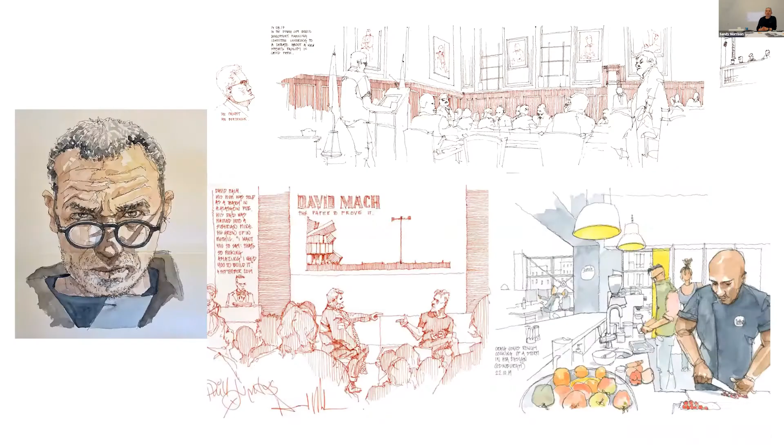Before I move on to that, I'll just tell you a little bit about myself. This is meant to be me on the left-hand side. I do a lot of drawing for my job. I'm involved with HTA in the design of all of the projects we do, so I draw a lot for that. And then I also have a little sketchbook, and I draw whenever I can as I go around.

The image at the top here is from a planning committee in Dundee. It's actually when we were getting planning for a regeneration scheme that we did at Mill o' Mains, north of the Kingsway. The scheme down below that is Phil Dupitis, who I believe is actually now an art student, or was an art student in Dundee, interviewing the excellent David Mach, who we're working on a project with in Edinburgh, which I'll show you. And the bottom right-hand image is our Edinburgh office, which is designed around the kitchen. We all eat together, and we have a collaborative approach to work, which I'll tell you a little bit about too. So, but first of all, 6 o'clock on a Friday night, let's cut to the chase.

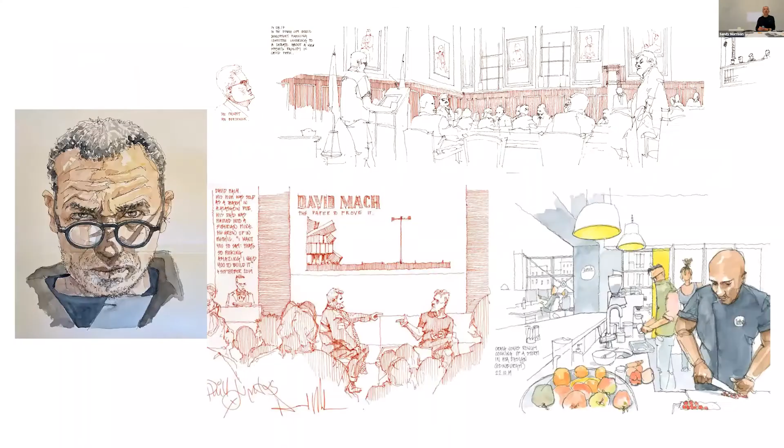Sustainability, we're all talking about that. We have an ever-increasing population, and we need to create biodiverse environments around technically refined homes. I'll say a bit about that. And then the way that we think we can do that is by using order to allow us to come up with solutions that we can repeat and to avoid the bespoke, in order to make things which would otherwise be very expensive because they were designed as one-offs, much more available to more people. And then finally, a little summary and a little discussion about beauty, not because we particularly think we've cracked it or we know what it is, but because we do think it's important. It's obviously important when we're making places that they are beautiful.

Forgive me while I drink my Friday night beer at the same time. So this is HTA, so there's about 200 of us. We're in offices in London, Manchester, Bristol and Edinburgh. And the office has been around for about 50 years, 51, I think we are now. This is from last year when we did posts about our sort of 50 years. Throughout that time, we've been focused on making places that people like to live.

We do all the kinds of places that people like to live. We don't build hospitals, we don't build prisons. People do live there, but they don't really want to. So we do everything else.

In the beginning, we became known as community architects. We were Hunt Thompson, and what distinguished a community architect was someone who actually went and asked the community what they wanted before he went and built something. That was innovative enough to make you stand out from the architectural crowd. So we were community architects.

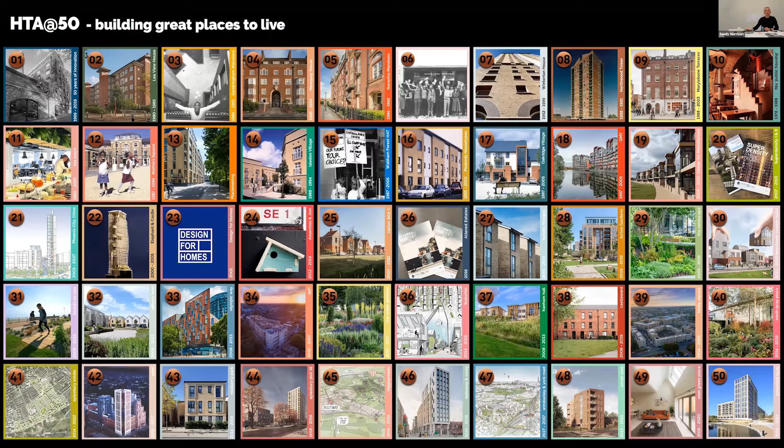We also want to be a great place to work. You're all training to be architects, and I think it's quite hard to be an architect. Quite a lot of people in their job, they either do it right or they do it wrong. We're in this interesting world where you're designing things, and sometimes people will like them and sometimes they don't, and that's a hard thing to take. So working as an architect or designer is quite tricky. And then the government or the world throws in the occasional recession, which makes it even harder. So we do want you, when working in our organisation, to be having an enjoyable time.

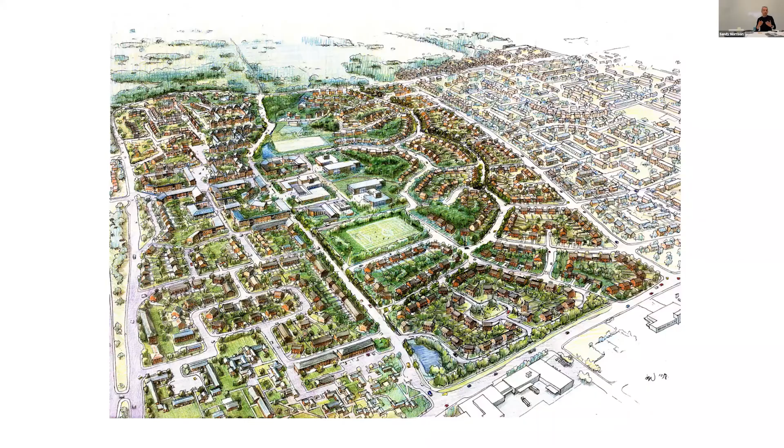So architecturally, it's a relatively subtle thing to do, because it's 2-storey semi-detached houses. It's not the monuments that were there before, or even the sort of modern urban place that architects and others are familiar with. However, it did deliver the sort of transformation that the people who lived there wanted it to do. And some of the big moves, like putting in these balancing ponds for the SUDS, really made it quite different from what it was before.

And then when we won an award for it from the great and the good at the end of the 10-year period, and it was all changed, it was Beck who turned up to collect the award. So whilst you might think, well, is that enough to have done with that place - we created the place that the people wanted.

So moving things on, that was 20 years ago, but I thought I'd talk about it because it was Dundee, and it shows you how we work with people. Working with people is at the heart of what we do.

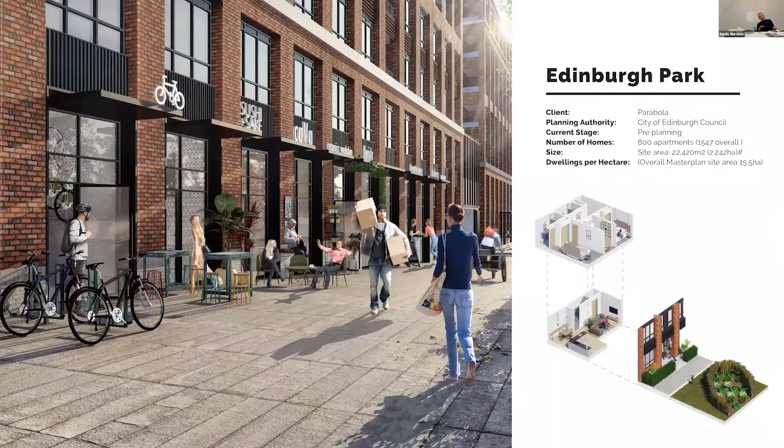So I was going to show you an Edinburgh scheme with a similar number of homes, but about 4 times the density of the suburban development we were looking at in Ardler. Ardler is 900 homes, about 30 to 50 dwellings per hectare. This is a bit more than that.

This is Edinburgh Park. There was a business park created here by Richard Meier, or to his master plan, with office buildings all around the central park. It's based on how people thought in the early 80s, and then they built it in the 90s. Everyone drives, parks here, comes into your office building - you can overlook the park, but probably can't go into it. This is the airport over here, the train line to Glasgow coming up there, and the bridge is there. So it's right on the edge of town, but it has the benefit of all the jobs - fantastic jobs, fantastic green space already there.

We worked on a master plan with Dixon Jones, Sutherland Hussey Harris, and Alfred Hall Monaghan Morris on the office buildings, and Gross Max on the landscape, to make this new southern half of the park next to Edinburgh Park train station. We did the build-to-rent and the social housing. I'll say something about the difference between those two, since some of you are looking at housing and different tenures just now.

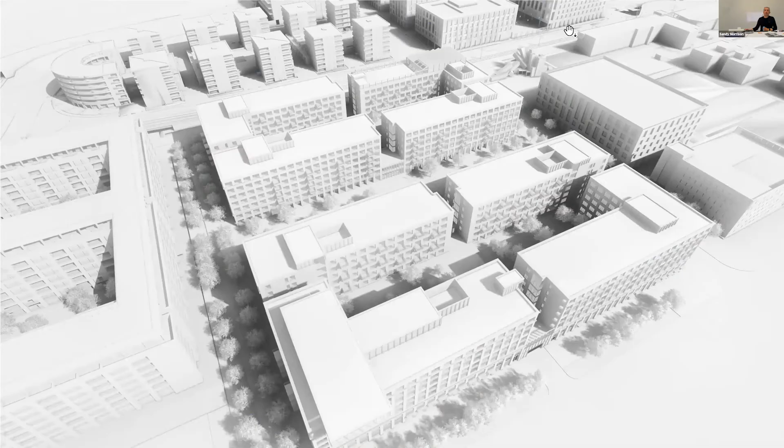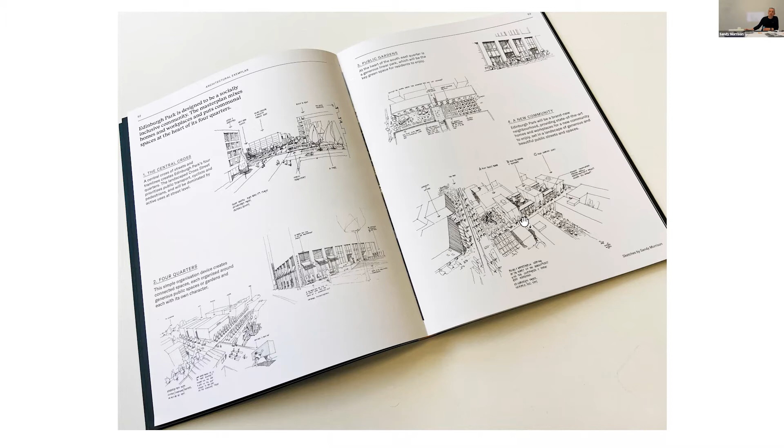The idea of the thing is basically a cross - the tram runs through the middle of it in a green corridor, and the tram stops just there. Then we built a new street running east-west in this direction, and then there's a big garden. We always like a big garden - I think living next to nature is a very important thing around here. This office building has now been replaced by the social housing building we've designed. Some of my sketches, which crop up from time to time, describe the key moves of the scheme: the central cross, the 4 quarters, a public garden at the middle of it, and a new community created around that.

The buildings were pretty big scale. For yourselves, looking at the schemes you're going to be doing in Dundee, we definitely recommend looking at local precedents and trying to learn things from them.

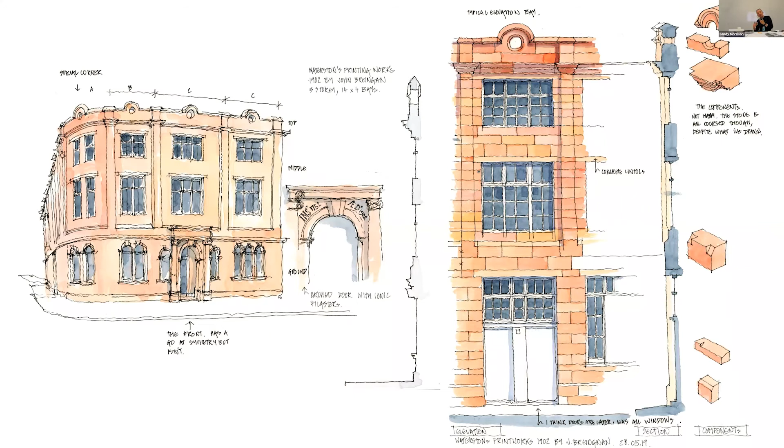So we were going to be making quite big warehouse-type buildings. We got out and had a look at some Edinburgh warehouses - this one's very near our office. What we're interested in here, and it relates to the order point we'll make later on, is the bay and how the bay can be assembled to make a bigger building, and how the bay itself can be made from smaller components that you can refine and design really well and then repeat. We like that approach.

A few sketches. The design quite often starts as early stage sketches to try and communicate the ideas of what we're trying to do. As I said when talking about Ardler, every move that you make with the space says something about the development that you're trying to create.

So we have a big central garden here and a build-to-rent scheme next to an expensive office park, and we've located the social housing at the end of that, so it has easy access to the park too, and we think that's quite an inclusive sort of move.

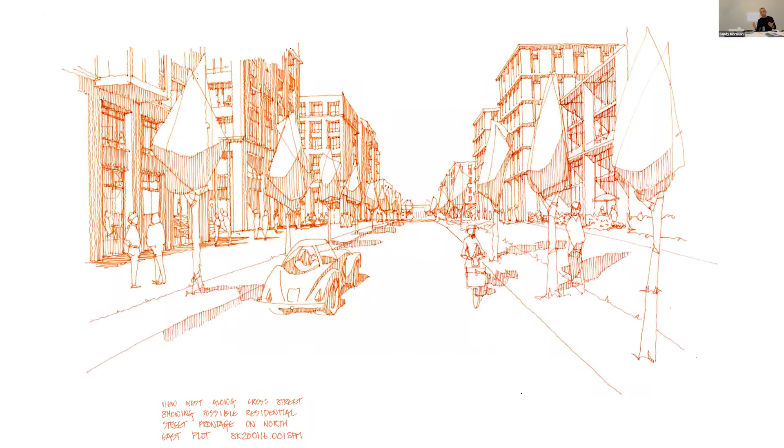And then we got to do both sides of the street here - build-to-rent side of the street on this side, and the social housing side of the street on that side there. And then when you develop that up, this is the sort of place that you start to make.

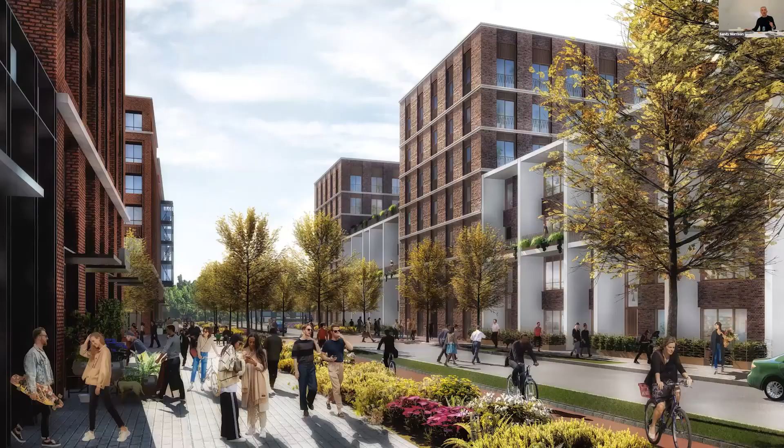Family housing in maisonettes here, a very green environment, bigger, simpler warehouse buildings with the apartments in them, segregated cycleways, and a distinctive thing for Edinburgh Park - nowhere to park your car. It's not seen as a car-dominated place at all, so we're not really allowing for the car. There are multi-storey car parks - if you come here and you want to park, that's where you go.

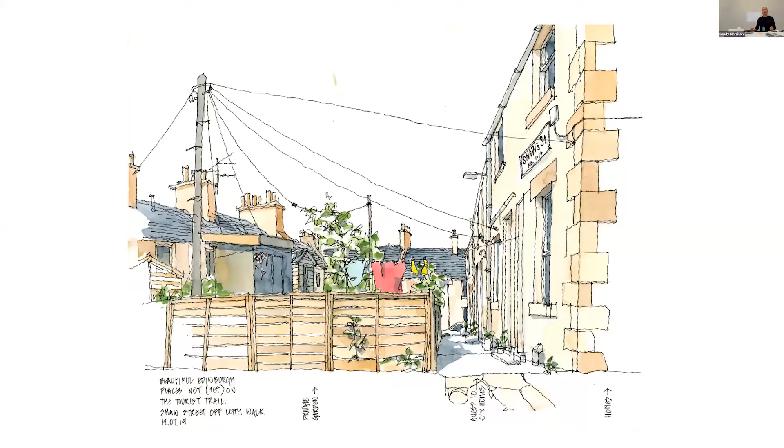And then again, sort of getting out there and looking for local precedent, which makes your scheme for this place a little bit different than it might be if it wasn't in this place. So this is just around the corner from our office, and it's a lovely little space. What they did here was there's housing along here, and there's a little footpath that runs between the housing and the garden, so everyone's garden is across a public footpath and away.

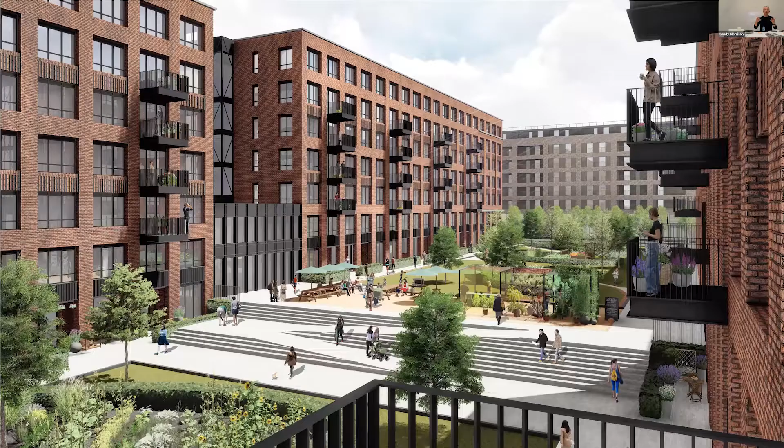And the consequence of putting all the private gardens into the public space is this incredibly green and interesting little place right in the middle, overlooked by everybody, and it has a very strong community feel. And we wondered whether we could do something different from that, but picking up on that theme in this new garden that we were going to make that ran down through the middle of our development.

So if you think that you have Hermiston Gate tram station here, and then you have the office buildings with several thousand people going to work in them, assuming that's what we go back to, you would then create this attractive garden that people could walk through in the morning, and they don't have to walk along the street, and this becomes a nice place to do and to be.

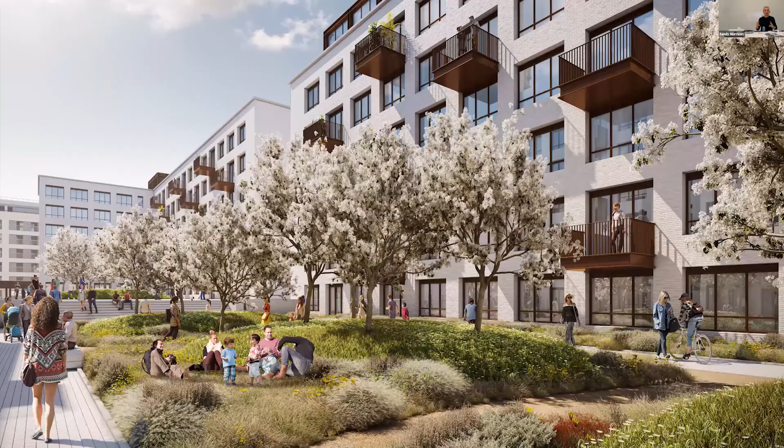And then Gross.Max filled this up with very attractive little spaces of different elliptical shapes and characters, where different things happen. And then we pushed all the balconies out into this space, and we think it can be quite attractive. On the other side of those buildings, just up at first floor level on top of the podium, we have another sort of garden, which is, in this case, for the residents of the build-to-rent buildings.

The change in the material here sort of picked up on the industrial aesthetic that we were pursuing with the red brick exteriors and the white brick to the courtyard.

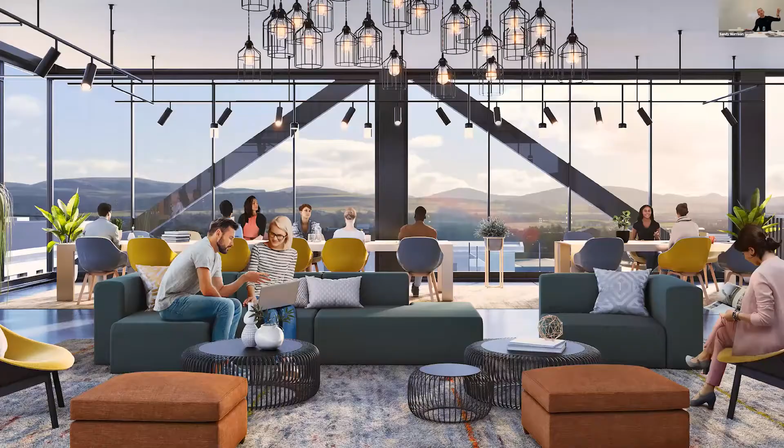We're very keen to use all the roof space, increasingly in development. Developments are denser, like I say, there's more and more people - how are you going to provide the attractive external spaces that they're after? So we're using the roof spaces as external roof gardens on the social housing here, and then on the build-to-rent housing, which uses all of its top floor space to make an attractive environment for all the residents. It doesn't have penthouses at the top level, it has lounges.

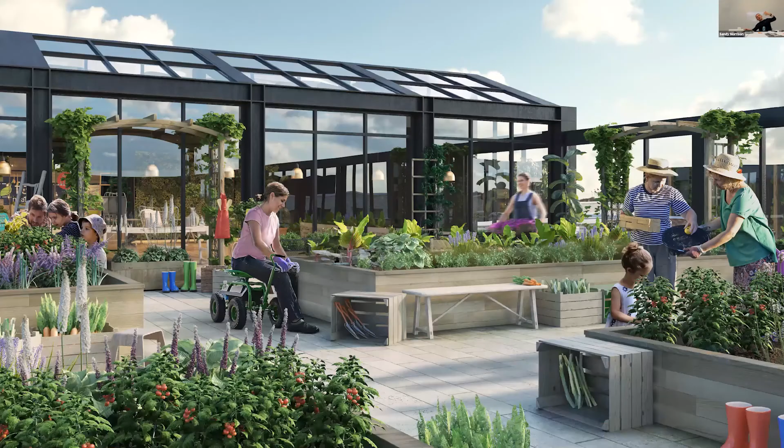So we put a little drone up and had a view to the south, and that's the actual view of the Pentlands that you'll get from that spot. Going back to the woman who wasn't wearing her wellies in the Eichler picture, definitely people growing and planting things is definitely a desire when people are living somewhere.

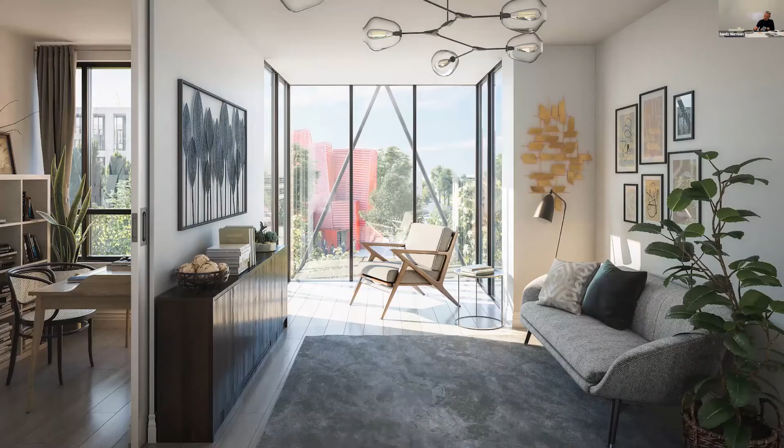So we used the roof space to make a big greenhouse and raised allotment beds. We're very inspired by the local East Lothian walled gardens and tried to make a space that had something of that quality. So having made, we think, quite nice streets down at ground level and a big garden and used the roofs, you need to make all the apartments fantastic too.

This is sort of the worst of the apartments, because this is a north-facing single aspect, one bed flat. So what we tried to do was push a bay out into the street, overlooking the square, which is just there. And if you've lived in Scotland at all, you'll know that come the summer, the sun comes right round to the north. So when you come home from work, you've got quite a nice space to sit in there.

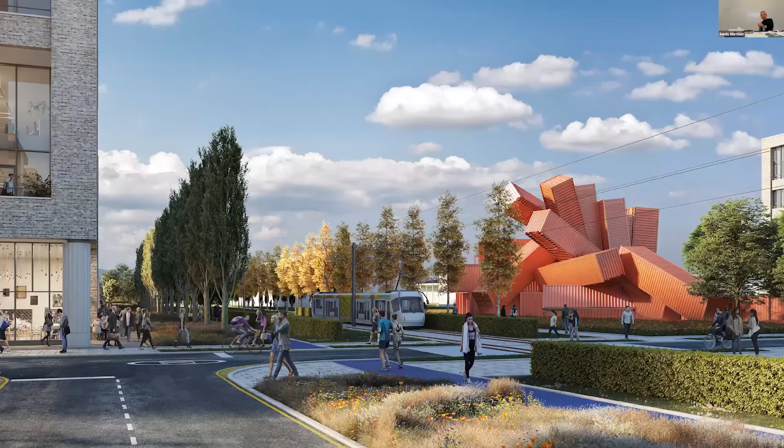And then the added advantage in this scheme, and it's always worth trying to work with artists or whatever in order to make the environment that you're making richer and more interesting, is that flat is actually looking out on this David Mach designed Mach 1 building here.

I'll move on to sustainability, my point number 2 of my 4 points. So the population is increasing all the time, and we used to look at sustainability as being a sort of bolt-on thing that you did to buildings, and it's completely changed from that now. It's now all about your attitude to how you're going to design your whole site right from the beginning, and I'll try and illustrate it from this scheme.

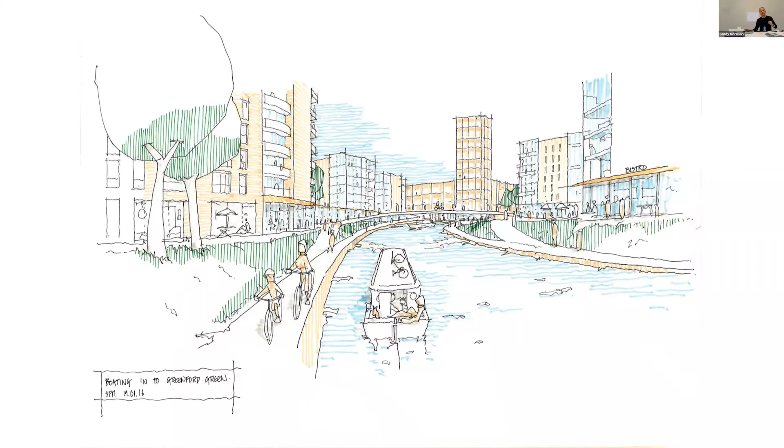So this is a project that we did in Greenford in London. We did it from the Edinburgh office. There's a canal here, and the idea was always to make sort of canal side living with build-to-rent accommodation, social housing, and private for sale housing lining the banks of this new place. We work for a big American build-to-rent investor and manager, they manage about 500,000 homes around the world now.

And this used to be the GlaxoSmithKline factory here, and it was the Hovis factory on the other side of the canal. They'd both been closed and were disused, and Greystar bought them both. So then we had the opportunity to design something which was on both sides of the canal and make a sort of canal living experience.

It's worth saying that all the housing round about here is all sort of 2-storey suburban semi-detached housing, no major public space or anything like that. And what it had lived with forever was a fence around all of this space here, and no one could ever go through it. It was always closed, it was always locked, it wasn't part of the community, and it would take you about 15 minutes to walk all the way around there.

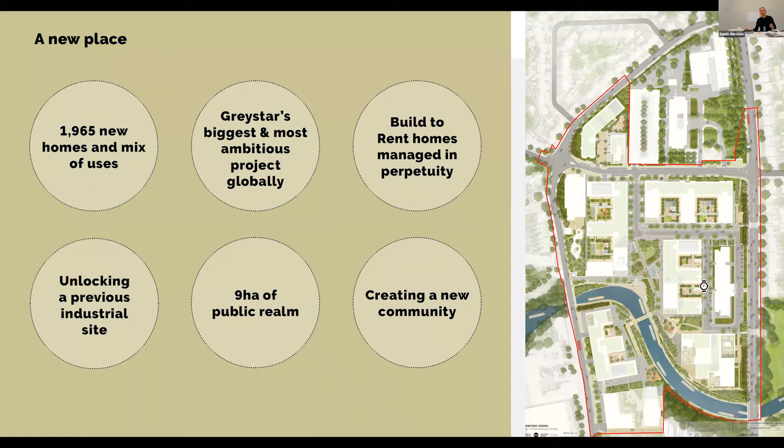So we were just about to open this up. What we wanted to do was create a bridge which would allow you to go diagonally across the site. But at the same time as wanting to create a bridge, which you can see we've started to make here, we didn't want all the stuff that goes along with bridges, like lifts and steps and all of these discriminatory, and indeed ugly and requiring maintenance things.

So the big number one sustainability move was to take all of the existing buildings already on the site, flatten them and crush them on the site, and keep the waste material on the site. And what that then allowed you to do was to lift the level of the ground adjacent to the canal to a level that you could cycle or use your pushchair to get right across the site, and people would walk along the canal side.

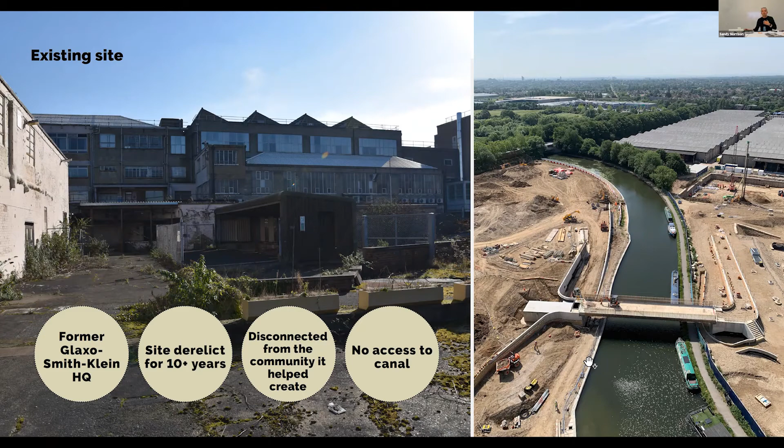It gave us the problem that the ground next to the canal was then about 2.5 to 3 metres above the level of the canal. And brilliantly, the landscape guys solved this by creating this south-facing amphitheatre. So we took a site which previously hadn't had anyone in it, and people couldn't walk along the canal or anything, and we provided a south-facing sloping space right next to the water, connected to that square up above.

And it's very accessible, and it's very green, and we want to create a biodiverse landscape. It's got dancing fountains and all the things that encourage people to come.

So just now we've only built one building. It's a big building, it's got 379 flats in it, this one here. But when we're finished, there'll be 2,000 homes around here, so it will be very busy and very dense. So getting the landscape in early and making it great is very important.

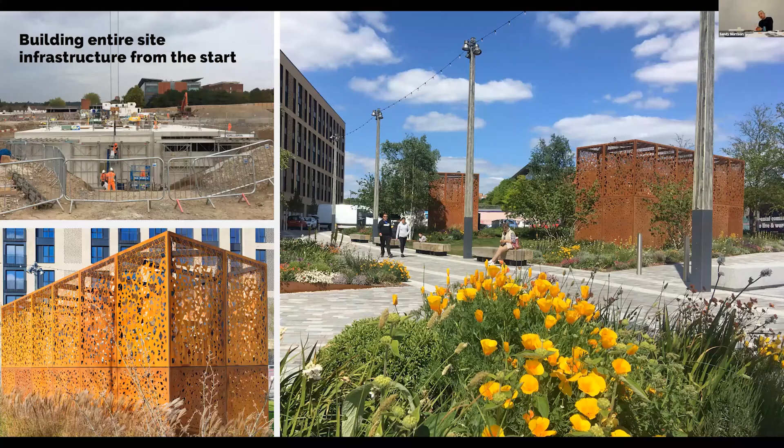Just moving on to the building a bit. This is the landscape, so the sort of third feature, I suppose, is the biodiverse landscape. So sort out the ground conditions properly, get the power right, make a biodiverse landscape.

So the point of this is, what do you do with the space? Everything that you do with space makes a point. So they're not penthouse flats on the top floor, it's space for everybody who lives here.

Now, the reason we were able to build the building very quickly, and the sort of big move that we did, was to build it in a factory. So this is a picture of the building under construction, and all of these are individual boxes that were constructed in a factory and brought here and assembled very quickly.

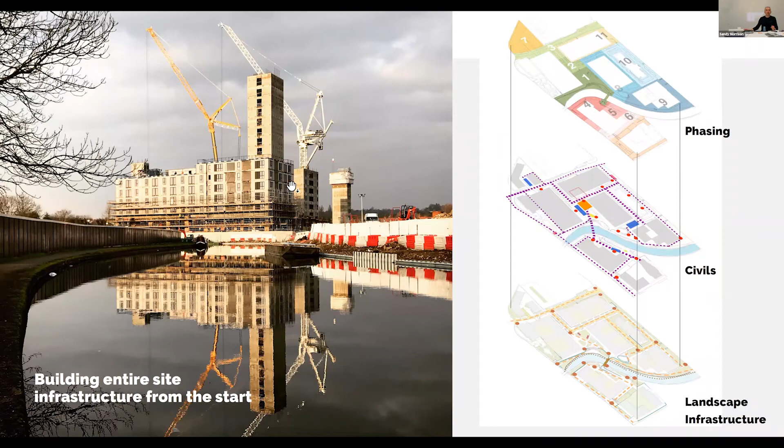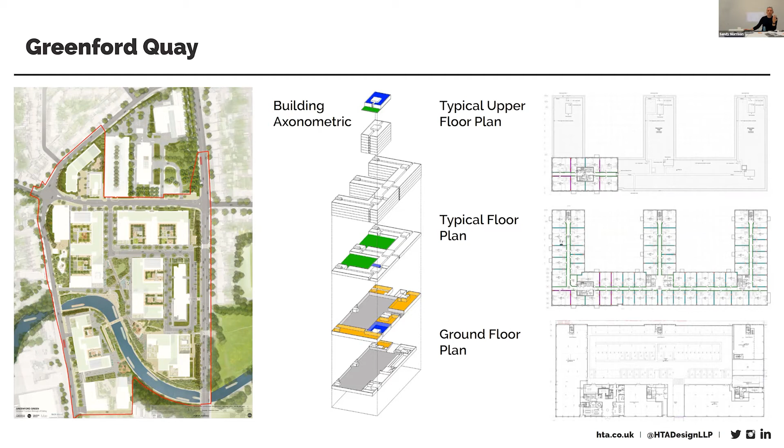And the way that we were able to do that is by having a very organised and regular plan. So the building is about 105 metres long, and the apartments are very repetitive. There are only, I think, 30 types, which might sound like a lot, but it's not. And by making it quite repetitive like that, we were able to use this factory construction system, and everyone still gets a great flat.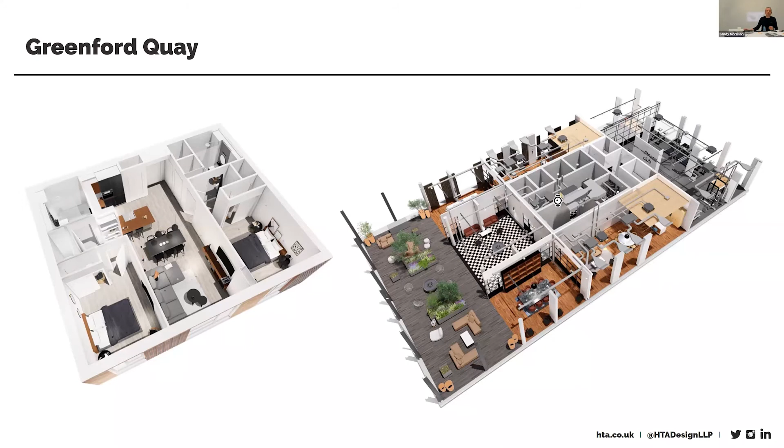That's just a little model of how the top floor works. But that move of making the thing in a factory, not doing it on site, not building a big concrete frame, and not bringing everyone to site who had to build it, saved us 26,000 tonnes of CO2, which is a pretty extraordinary saving.

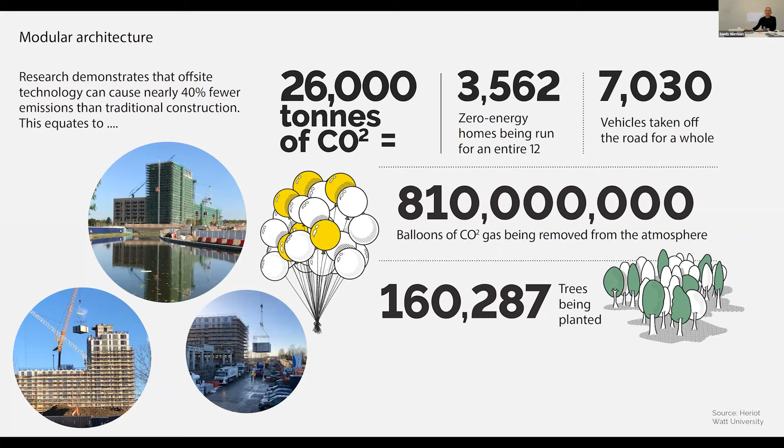That's not all saved in the construction process, actually. That's also saved - there's a saving to come, which is part of that as part of the demolition process.

That point brings us to point number 3, which is about order. Achieving order in design allows us to democratise quality. What I mean is, how can you make something that's better quality than people expect for the price? The answer is repetition. You design it once, put loads of effort into designing it really well, and then you repeat it. If you have to design everything from scratch, the quality is lower or the cost is higher. It's inevitable.

So I'm going to talk a bit about factory manufacture. Factory manufacture and off-site manufacture sit somewhere on a sliding scale, which people refer to as pre-manufactured value. At one end you've just got simple components, maybe made in a factory. Then you get panels, and eventually you get to the point where you're making the bathroom and kitchen in a pod. Then you have volumetric modular, which is making whole rooms, which is what we did at Greenford. Beyond that there's a system which includes the external facade also as a prefabricated element.

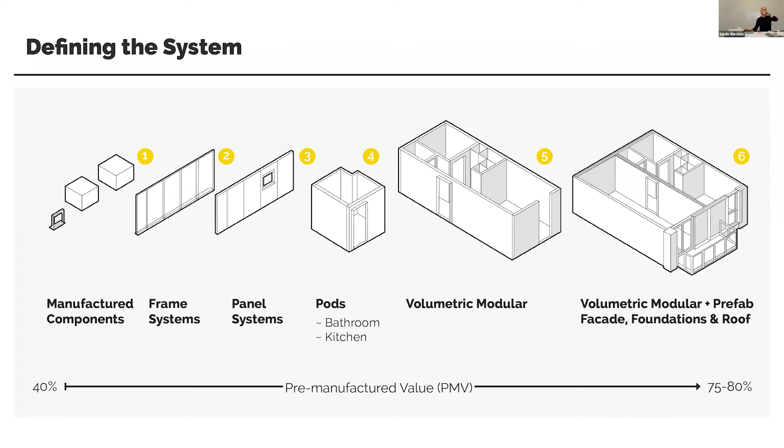It's always good to know what something actually looks like. This is a student housing bedroom being loaded into site at this Apex house at Wembley, which I'm going to show you how we built. In here is an entire bedroom - the bed's in there, the furniture's in there, the pictures on the wall, the carpet's rolled up on the floor. Once all the final finishes are done, the bathroom's in, everything is here, and it'll all be plumbed in.

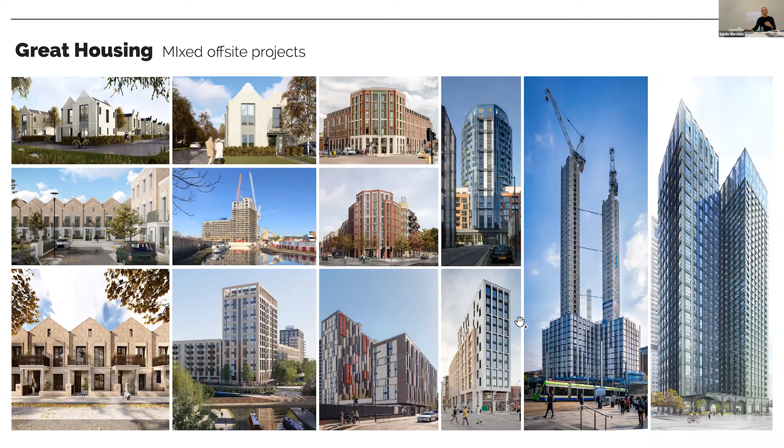It's for a big building, for a tower, but we're also now working at the lower scale too - doing 2-storey, 3-storey houses like that. Here's Greenford that you just looked at, and we're doing some bigger buildings too. There's a drawing of the same thing.

One of the interesting things about the modular approach is that it's an answer to a question which is quite often not the question, how should we build the building? It's the answer to other questions like, how do we stop construction from being dangerous, how do we make construction safer - build things in factories. How do you make people want to work in the construction industry? It's better if you don't have to go and use a chemical toilet on the curbside in the street. So get people into factories making things to higher quality.

Obviously it's quicker, we can reduce the waste because we control it, and we're building more projects in the same place so we can use materials more cost effectively - it's more predictable in terms of cost and performance. One thing that's not in here, but I think is really important coming back to the people point, is that if you build it faster with far less vehicle movements, it's far less of a negative impact on the neighbourhood you're working in. I think that's pretty important.

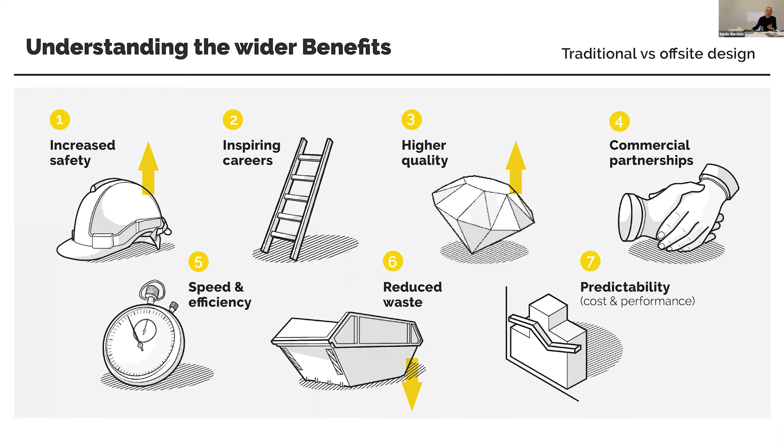The other thing you can do is build a prototype. So a year before anyone was moving into Greenford, we'd already been round the apartment I just described, because we'd made one - we just made one at the factory. Even though you think you've spent all the time in the world designing everything beautifully and it's all going to be fantastic, you turn up and use the actual thing, and then you realise you want to change loads of stuff. So you can change loads of stuff in the prototype, and not when you get to site.

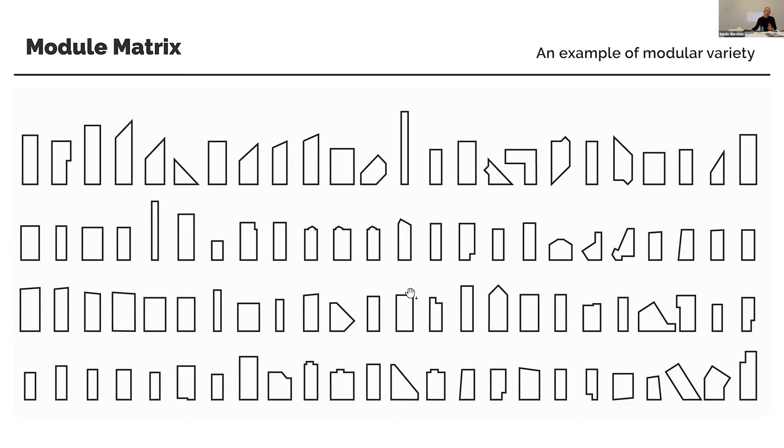Here's an example of modular variety - it's actually all the modules we've designed. The point of this is that you can make lots of different modules, so you're not really constrained as a designer. However, that shouldn't compete with the idea - the idea is to make something really well and repeat it. So don't try and build a modular building that uses all of these in one project.

Time for a graph. In this era we're all spending lots of time looking at graphs, so here's one. This is about the time that you save in construction if you build things the way that I'm describing.

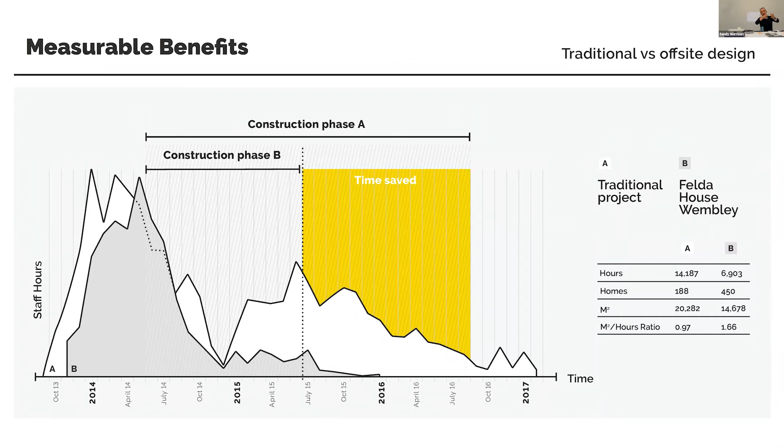In this case of these two comparative projects, we saved about half the time. More importantly for designers, all of this time was wasted time - time spent on a construction project which was traditionally designed once it was on site. Quite a lot of that is people just trying to make the thing you've already designed cheaper, wanting to change bits of it, do them differently. The good thing about off-site manufacture is once we've designed it, someone builds it in a factory, and we build the exact thing we told people we were going to do - much better from a design point of view.

I'll go a bit faster, but just to talk through how to build it - I can't speak to students without talking about how to build stuff. You make the room in a factory, bring it along to the site where you've already made a concrete transfer slab and a core to stiffen the building. You lift all the modules up into place, and then using mast climbers, which you've no doubt seen on buildings in Dundee, you apply the facade. That's quite important because you have to do everything by hand when you're lifting it on the mast climbers, so you can't make the thing out of things which are too heavy. And then you complete it.

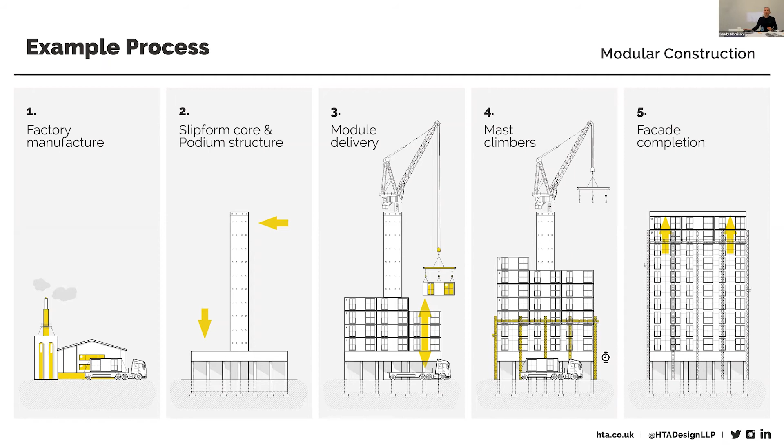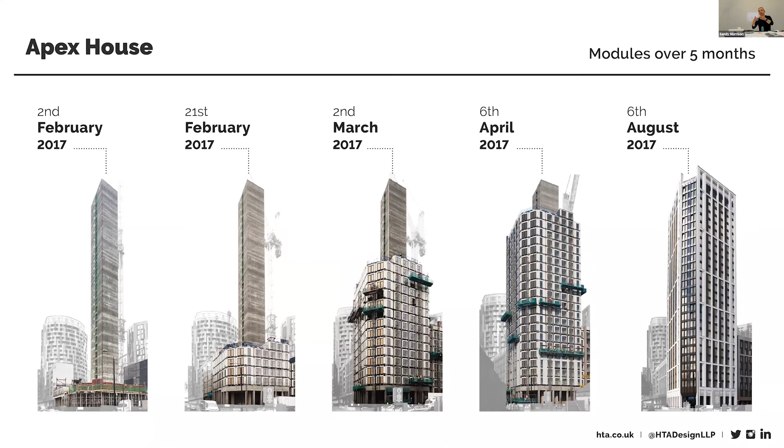There are all sorts of benefits to that - you can get on and do something else with your life, but also if you're making new neighbourhoods like we are doing, it's much better to be able to do them quicker rather than slower. No one wants to live on a construction site for all that long.

We've written a book about this called the Modular Housing Handbook, so if you'd like to get that, please do. A little bit of a problem with it from Scotland's point of view is that currently it's very English focused, but Scotland has been very far ahead, I think, previously in timber frame and some off-site manufacture for the rigs and stuff. So I think we'll soon be on to that.

So the fourth point, which is more like a discussion, because I don't really know what I think I want to do about the first three points - the beauty thing is the challenge. Once you've made something focused around people, done it sustainably, built it in factories, and done all that worthy stuff, well done. But actually what you're trying to do is make something that people are going to look at and think, yeah, I really want to live there. And that's important because the places that we love are the places that we're going to have for longer.

Just a few slides on that, and a couple of points to make. This is Hanham Hall, a scheme we did in Bristol, which was the UK's first zero carbon housing development. So this is zero carbon, but I come back to my point about how you use land and the message that that gives.

Hanham Hall has a big space in the middle, which would normally be used to park your cars and things like that, and in this development it isn't - it's used to have a greenhouse. There's a continuous greenhouse that runs down effectively the central street, and you can see from the picture that it's really popular and well subscribed, loads of people use it. It becomes the focus of the community that you can come out and do this. That choice of deciding to have a greenhouse in the middle and not somewhere you park your car is a kind of essential thing to making people love the place they're in. And I think arguably, even though the building is not necessarily beautiful, the idea is beautiful, and the building becomes beautiful as a result, if that makes any sense.

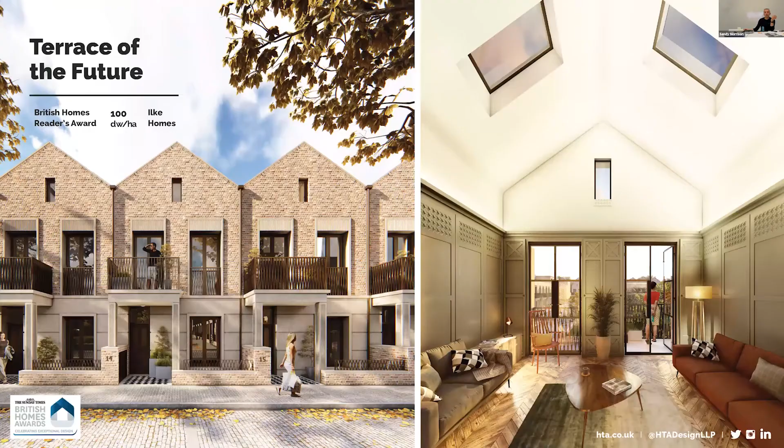And coming right back to the home, where we started—how the person feels in the home, how we make that uplifting, and the connection between inside and outside.

This is a little scheme we did just to finish on, almost—it won the Sunday Times competition, voted for by people, for the British Homes Readers Award for the Terrace of the Future. When we were talking, all sorts of people did all sorts of things, but we won it with this very simple little scheme, which is all modular, and we are building some of them.

How do you take every single step you can possibly take within a dwelling to make the thing uplifting—whether it's got a fantastic ceiling like that, or whether it's just apartments like this?